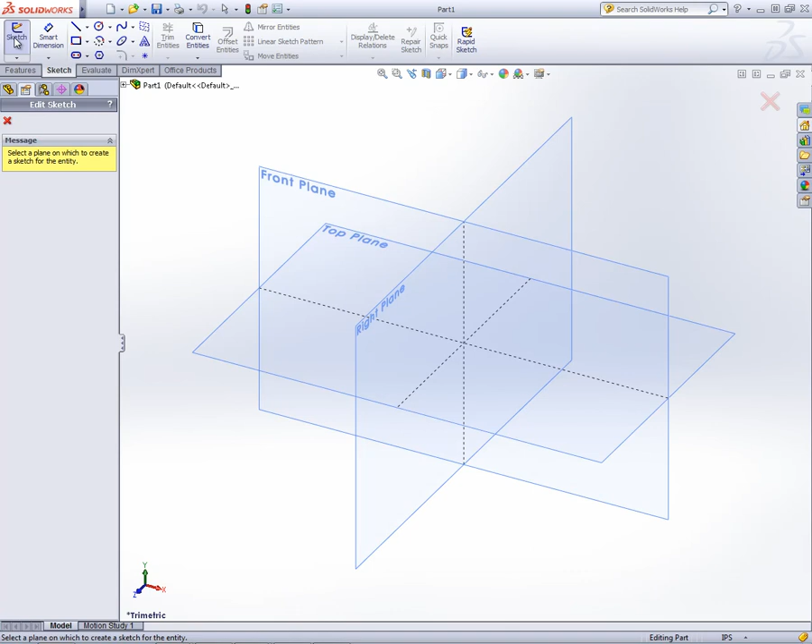I'm going to left click on the Sketch tab, left click on the Sketch icon, move my cursor to the front plane. When it becomes highlighted, we'll left click once, and then we'll right click. A pop-up menu will appear. We'll left click on Display Grid. And the first thing we'll draw is just a simple circle. We'll extrude that, and that will become a wrist pin.

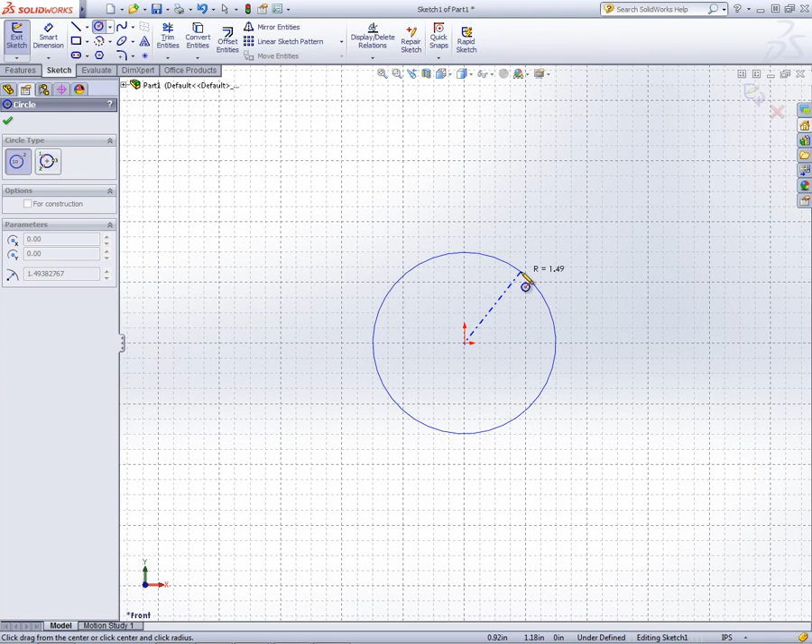So we'll left click on the circle command, move our cursor to the origin, left click one time, drag that out, left click, right click, select. We'll left click on Smart Dimension, we'll left click on the circle, drag that out and enter 0.5. We'll hit the green check mark. Then we'll use the mouse wheel to scroll it up a little.

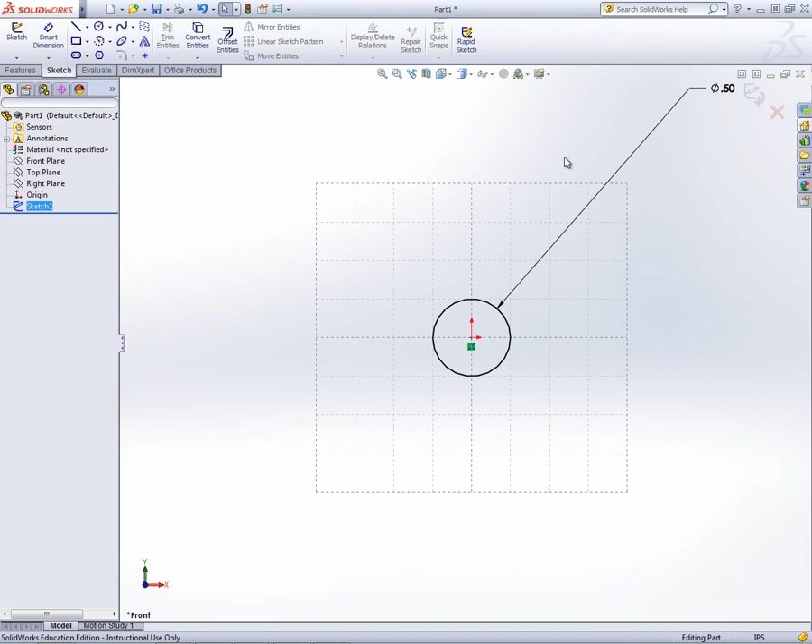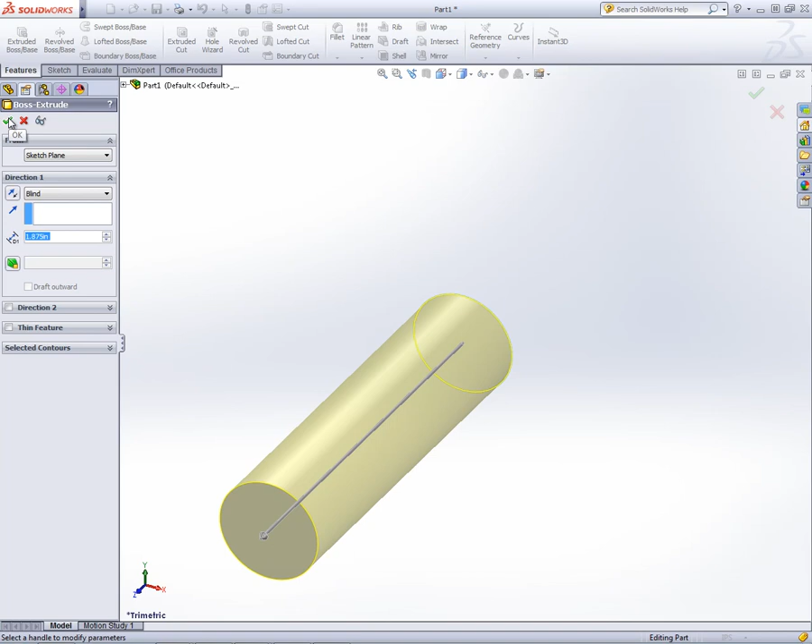We'll right click, exit sketch, left click on the Features tab, then we'll left click on Extruded Boss Base. We'll scroll it out a little bit and enter 1.875 for the extrusion distance. And we'll left click on the green check mark. And then we'll left click, and we should have a wrist pin that looks similar to what is shown. We'll save this.

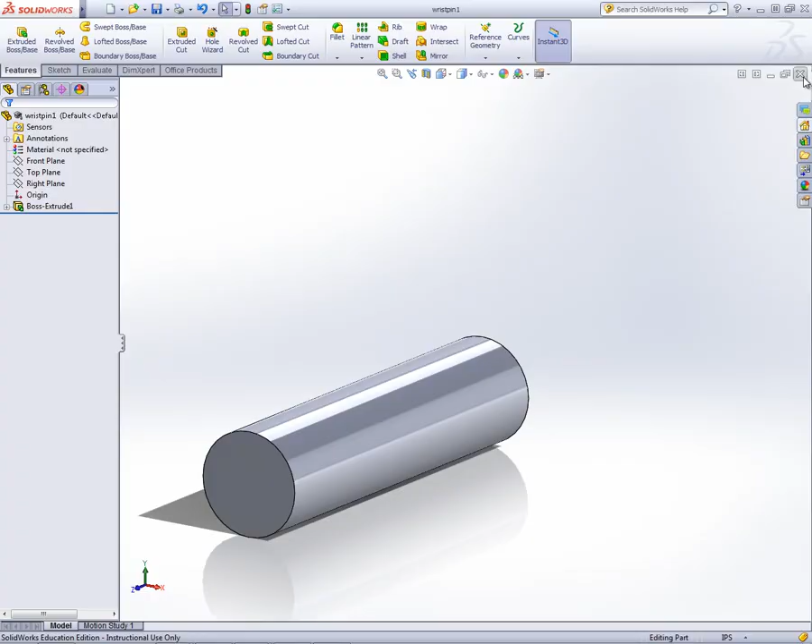This will be one of 5 parts that are going to be used in a future assembly. And this will be part 1. We'll call this wrist pin 1. Save. And then I'm going to close this. We'll start a new part.

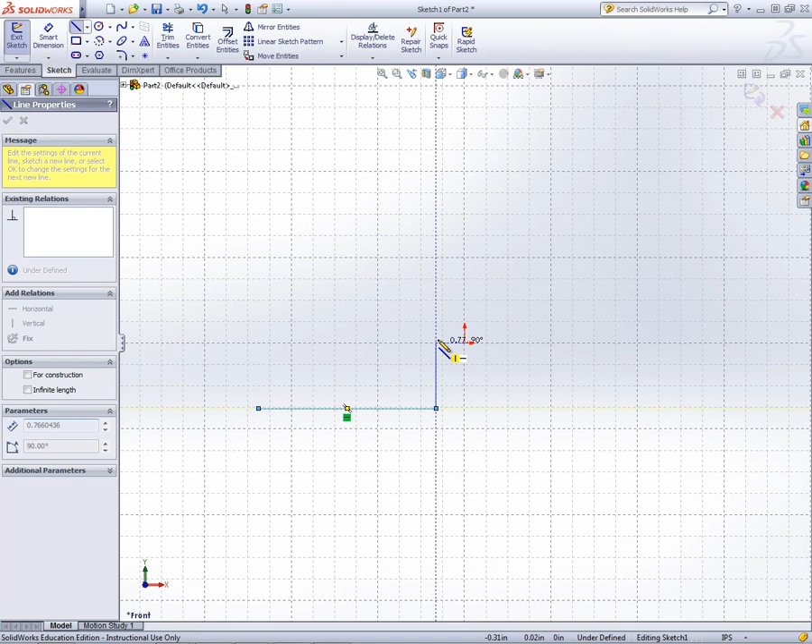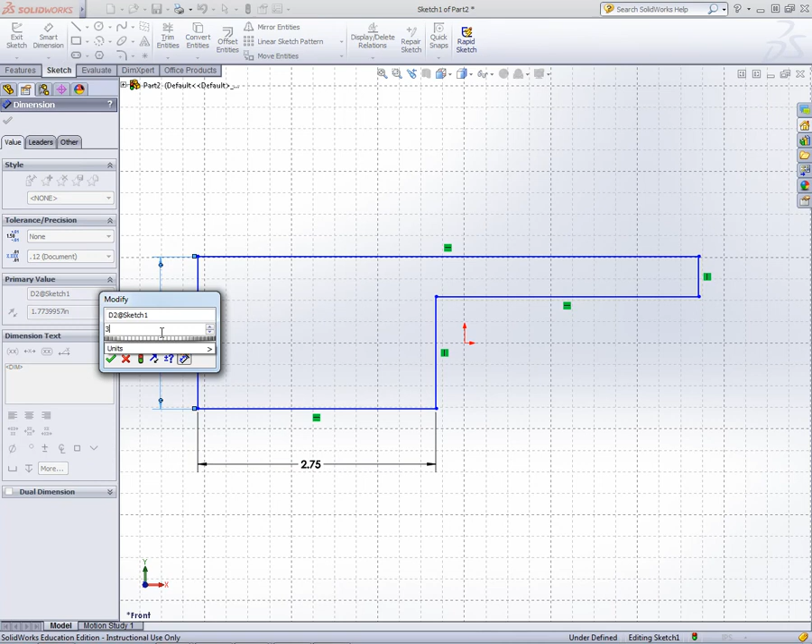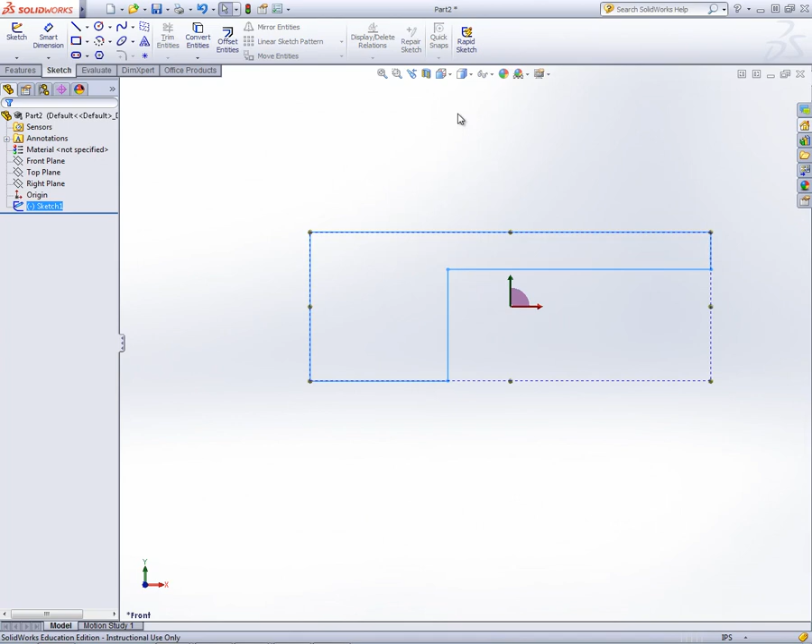Dimension the overall to 8. We'll scroll out, and we'll dimension this to 0.75. Then I'll hit the green check mark. We'll right click, left click on Exit Sketch. We'll left click on the Features tab, left click on Extruded Boss Base, and we will enter 2.25 for the extrusion distance.

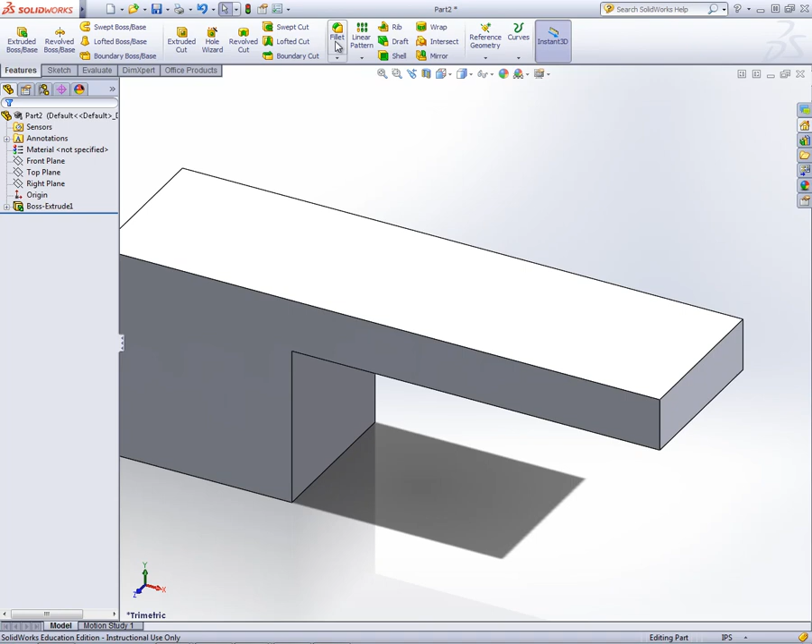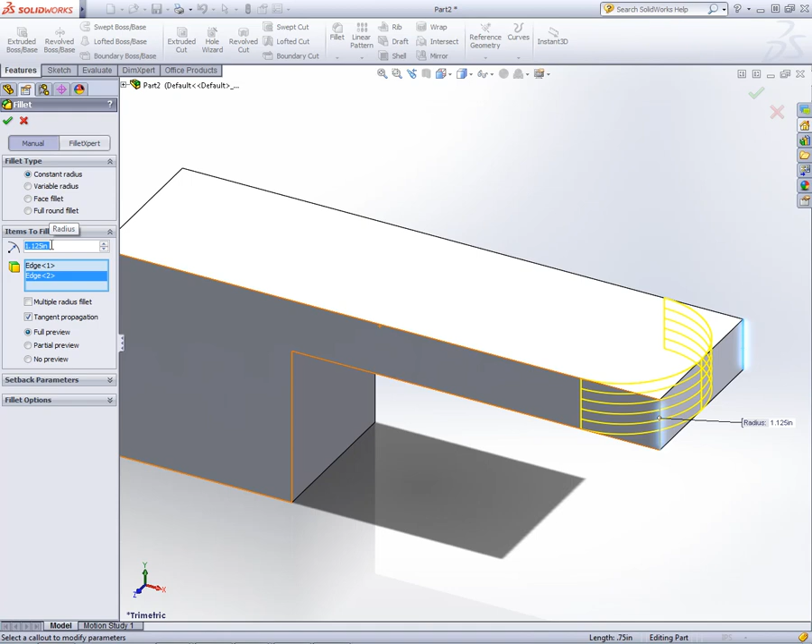Then we'll clean this up a little bit by adding some fillets down here on this lower edge. We'll left click on the Fillet command. Make sure our dot is in full preview. We'll move our cursor to this edge, left click once, move to the other edge, left click once. We'll enter 1.125 for our fillet radius and hit enter. We'll get a little mesh that shows a preview of what our fillet's going to look like. Then we'll left click on the green check mark.

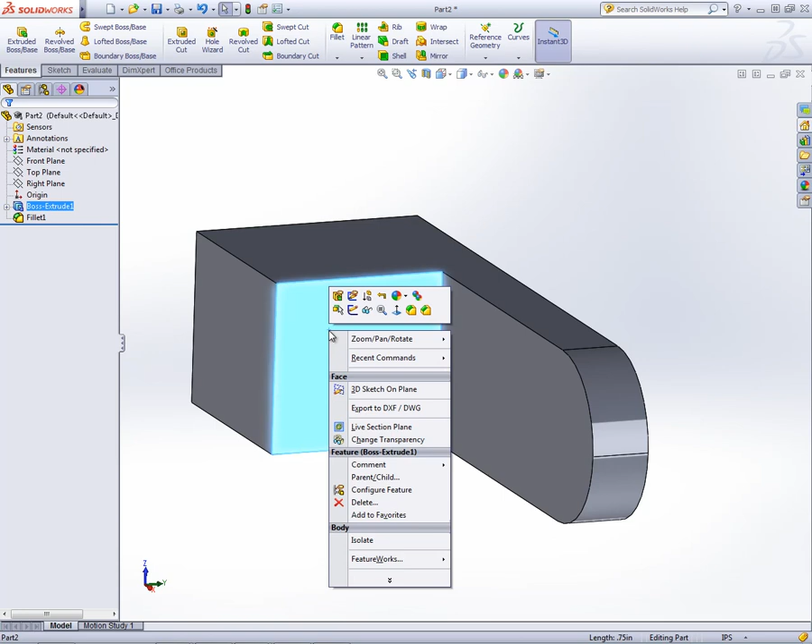Then we'll push the mouse wheel down, rotate the model up. We have two more things that we need to do. So I'm going to move the cursor over this underside face. We're going to create a sketch on here. We'll right click, sketch. We'll move up to the circle command. We'll left click on circle. Move the cursor down into this area.

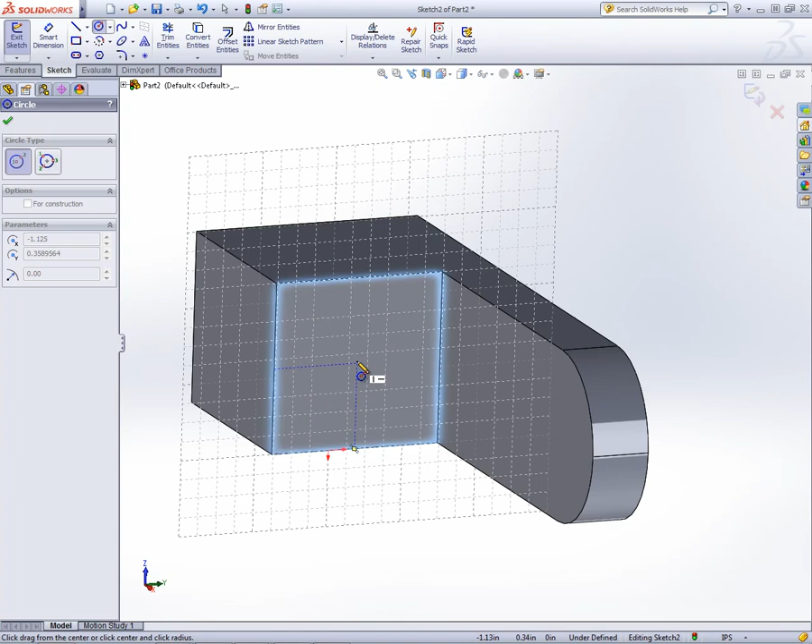If we can get the midpoint of each one of these lines, and it's not always easy to do. There we go. Now we've constrained those on the center midpoint of each one of those lines for convenience. We'll left click on Smart Dimension, left click on the edge of the circle, drag the dimension out, and we'll enter a 2,

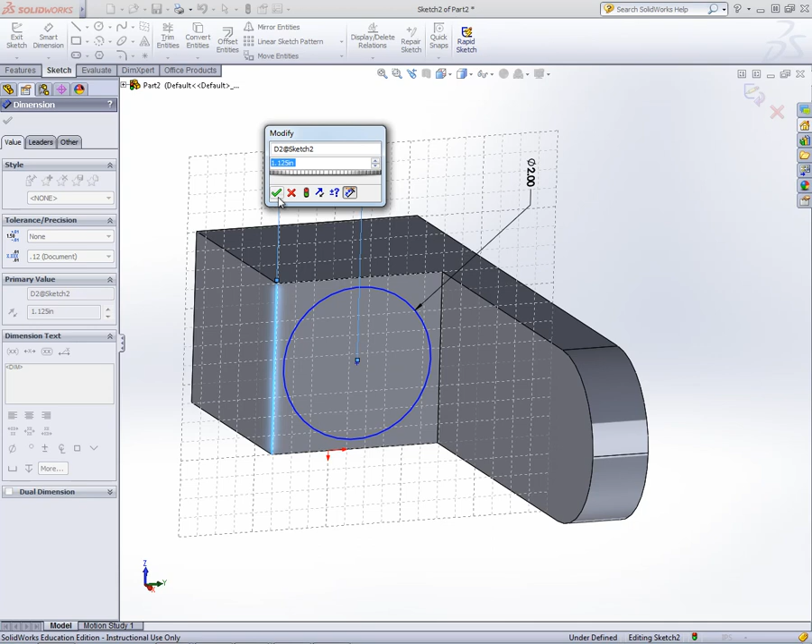and then each one of these 1.125, that works. And hold on, we'll have to hit escape. We'll hit the Smart Dimension again, and we'll drag that out to 1.125.

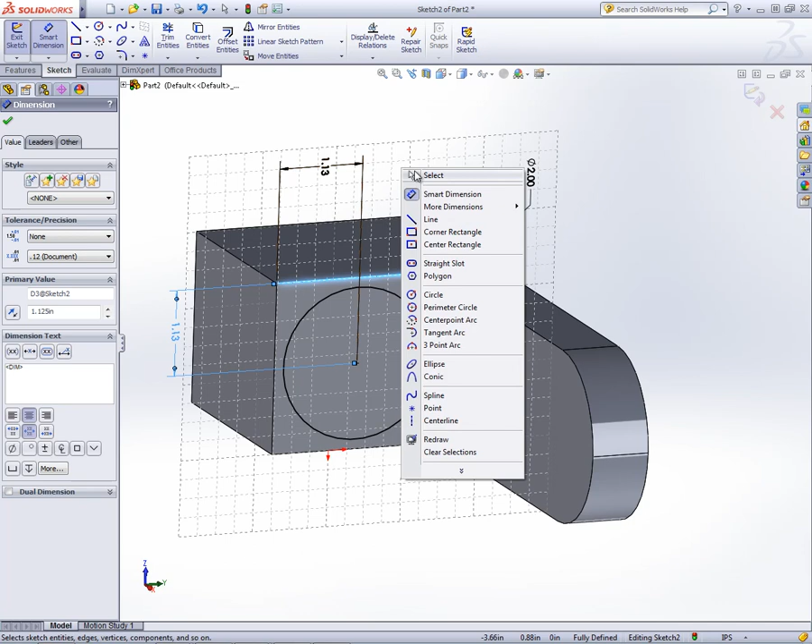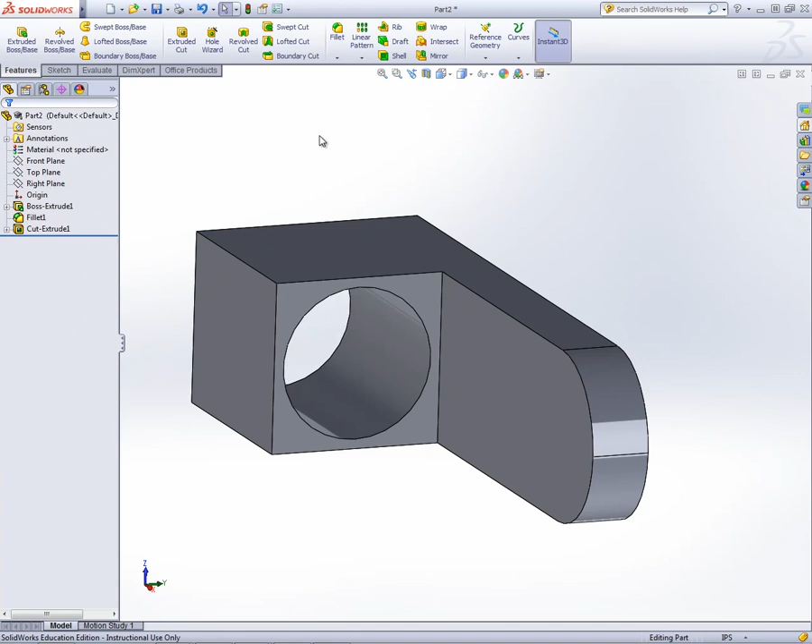Then we'll right click, left click on select, right click again, exit sketch, left click on extruded cut, and it plugs in our last extrusion distance of 2.25. We need 2.75, and we'll hit enter. Left click on the green check mark, left click out in the workspace. Looks like it cut all the way through.

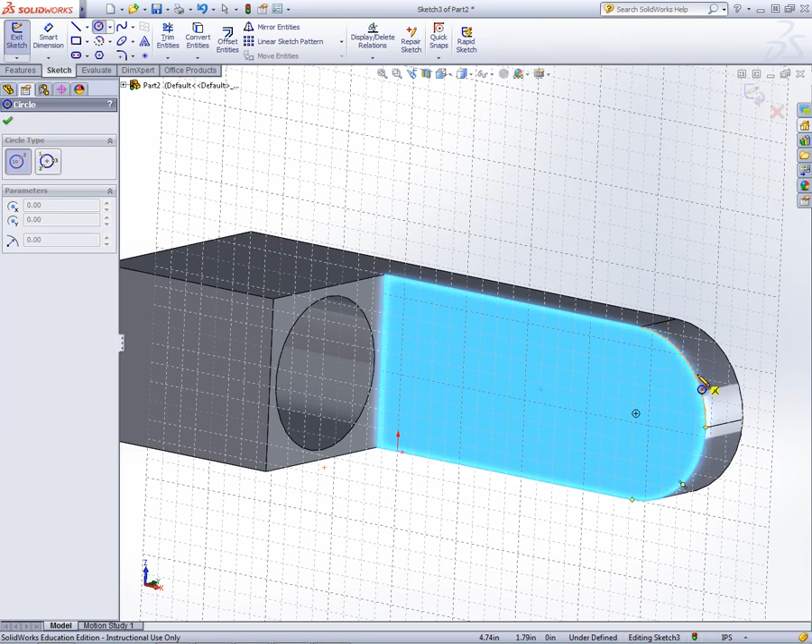Then I'm going to push the mouse wheel down, and we will put a sketch on this surface. So once this inside surface becomes highlighted, we'll right click, left click on sketch. We'll move our cursor up to the circle icon, left click on the circle icon, and we're going to use the center of the fillet radius for the center of our circle. So I move my cursor over the edge, and once the center of it pops up, I just kind of sneak my cursor down there, left click one time, drag it out, left click, right click, select,

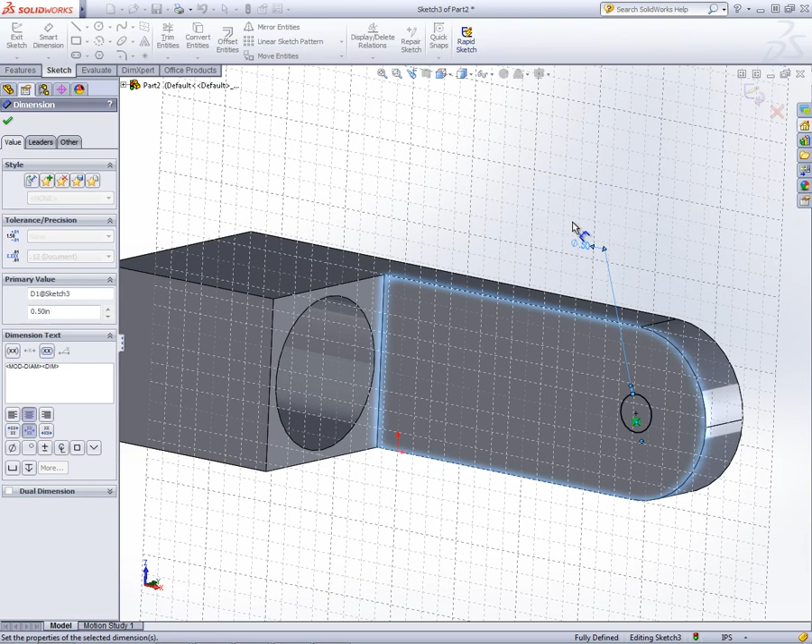left click on Smart Dimension, left click on the circle, and we'll enter 0.5. Then we'll hit the green check mark, right click, left click on exit sketch, left click on extrude cut. This only needs to be 0.75 because that's the distance of that thickness of that extrusion. Left click on the green check mark,

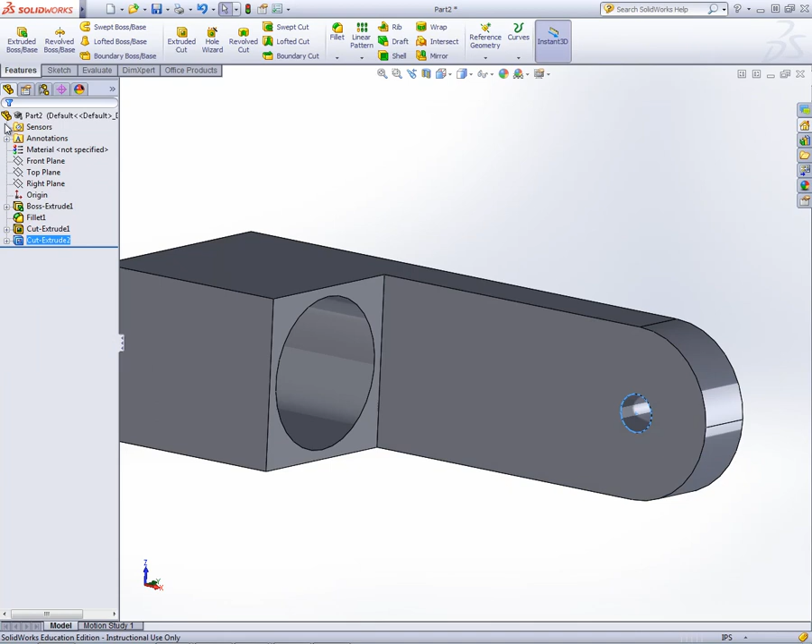left click out in the workspace, push the mouse wheel down, and we now have our completed piston case, which we'll be using in a future assembly. So go ahead and save this, and that concludes this module on the creation of the wrist pin and the piston case.